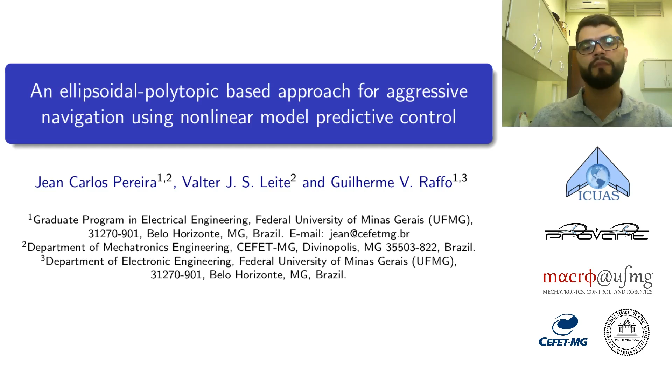I and Guilherme are with the graduate program in electrical engineering at UFMG. I and Walter are with the Department of Mechatronics Engineering at CEFET-MG. Guilherme is also with the Department of Electronic Engineering at UFMG.

The presentation is divided into 6 main topics as follows. First, I will introduce the paper and right after define the problem that we are pursuing. Then I will show the main aspects of our proposed solution, and in the end I will present some results corroborated with a quadrotor UAV from numerical experiments, and draw the main conclusions of the paper.

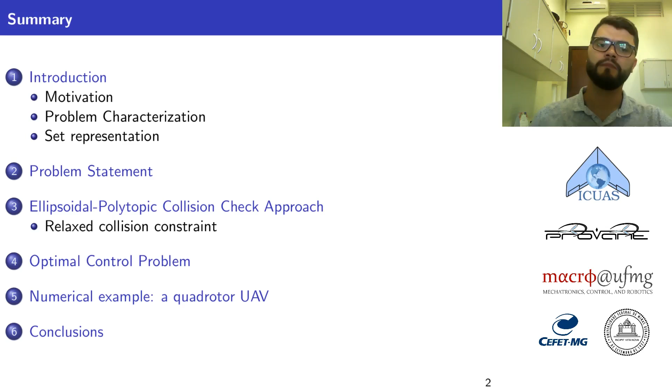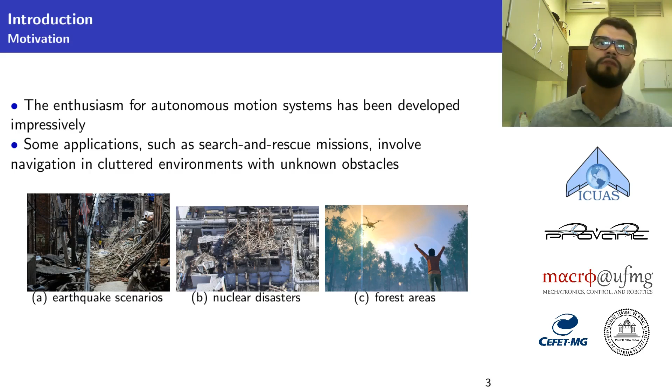So autonomous motion systems, which can be a robot, a car, a UAV, have attracted the attention of society in general in recent years. Some applications, such as search and rescue missions, involve navigation in cluttered environments with unknown obstacles. Typically, these vehicles must deal with earthquake scenarios, nuclear disasters, and forest rescues, as we can see in this image.

Let's assume, for example, that a disaster has just occurred. A distress call is then received by the firefighters for a person that is trapped in the rubble. Then the officers receive only a location point from a cell phone tracker, for example, that sends a GPS signal. However, this location is usually inaccessible or in danger of collapse, as you can see, for example, in this image.

A person inside sends a signal here. The firefighter receives just a GPS signal. So autonomous motion systems that can help this officer, such as a UAV or a mobile robot, are very useful for this type of mission.

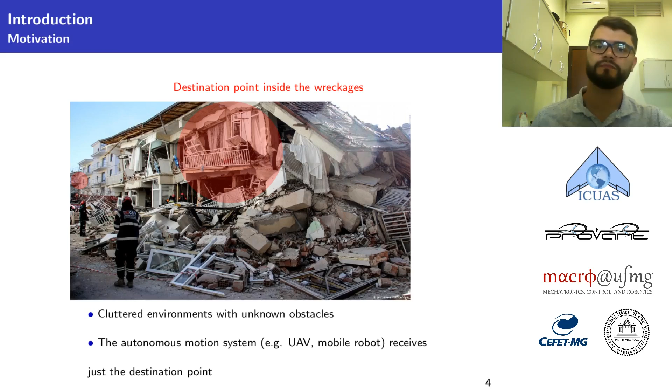Considering a UAV in the mission, the aircraft must navigate autonomously to the destination point while avoiding obstacles that have been discovered in real time. This means that the UAV must be capable of performing deviation maneuvers autonomously. But what happens when the available free space is not trivial? For example, when just a narrow gap is available to the UAV, as is shown in the figure.

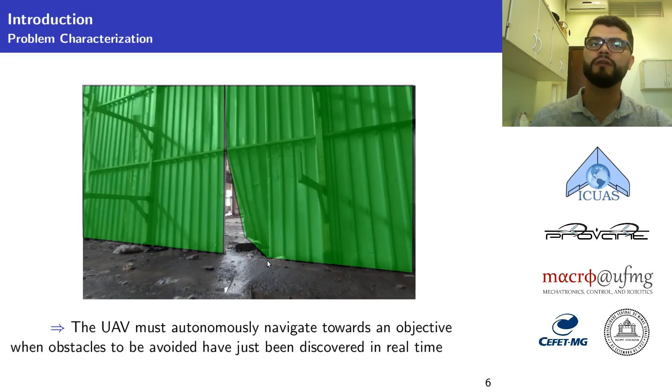Or to put it another way, what happens when the UAV attitude influences the success of the deviation maneuver? In this situation, the UAV must execute an aggressive maneuver. That means that the aircraft needs to fly fast, dealing with large linear and angular accelerations, while the UAV attitude is taken into account during the obstacle deviation.

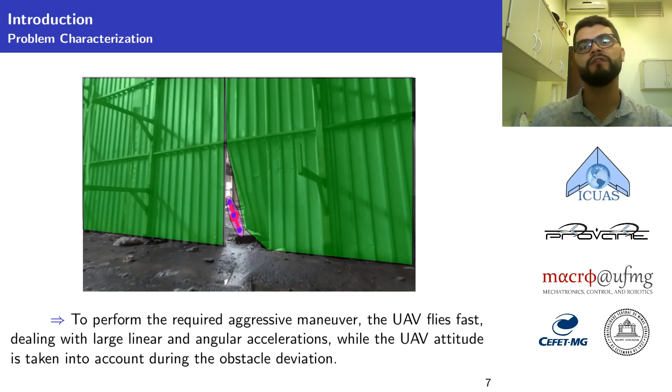Dealing with aggressive maneuvers requires a high-performance controller, since extreme flight conditions are required of the UAV. Furthermore, the controller must deal with the collision avoidance requirements, taking into account the UAV attitude during the deviation maneuvers. Also, since aggressive navigation is required, representational singularities should be avoided in the problem formulation.

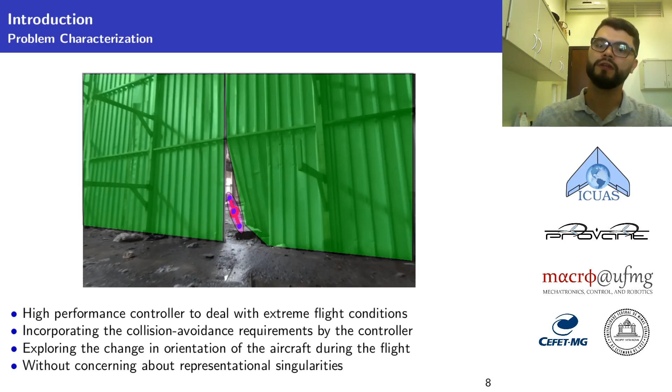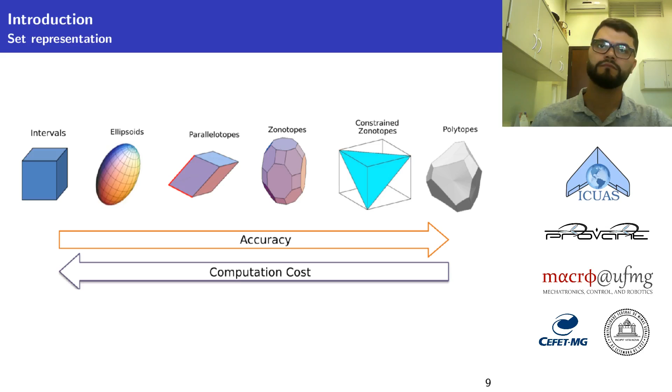An important design step in an autonomous navigation scheme with obstacle avoidance capability is determining how to model the motion systems and how to model the obstacles. The kind of set used to represent them usually is a result of a trade-off between accuracy and computational cost. The symmetric sets represented by intervals, ellipsoids, parallelotopes, and zonotopes have simpler representation and consequently simpler set operations. However, their accuracy is dependent on the object type, and usually an approximation is applied to model arbitrary shapes.

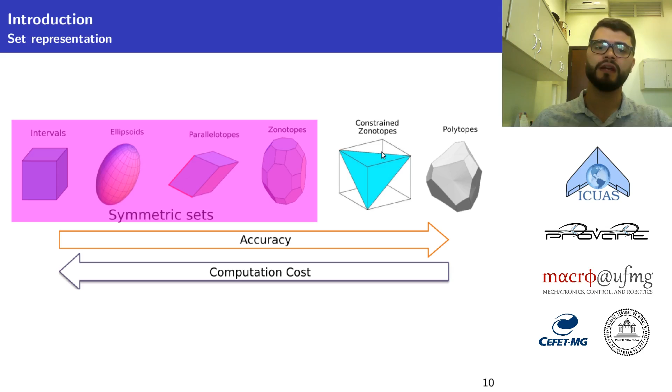On the other hand, we have more complex set representations. We have the traditional and conventional polytopes and the recent class known as constrained zonotopes. Although constrained zonotopes provide exact set operations with smaller computational burden when compared with polytopic ones, the intersection between two constrained zonotopes is achieved just by linear programming. This is a problem for us because NMPC with collision avoidance capability concerns the conditions under which the intersection between the sets occurs, which must be included in the optimization framework.

As most of the motion systems can be modeled as symmetric sets, and obstacles usually have arbitrary shapes, we propose then a mixed representation, and we derived an algebraic condition that checks the collision between an ellipsoid and a polytope.

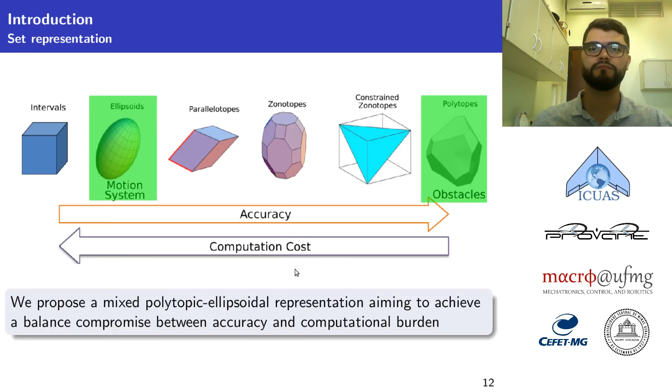Therefore, the main problem of our paper can be stated as the design of an NMPC for aggressive navigation of motion systems, modeled as a rigid body whose dynamic equations are formulated on SE(3). Usually these equations are obtained from the Newton-Euler approach as shown in equations 1, 2, 3, and 4. Here we see that the attitude of the motion system is parameterized by the rotation matrix R.

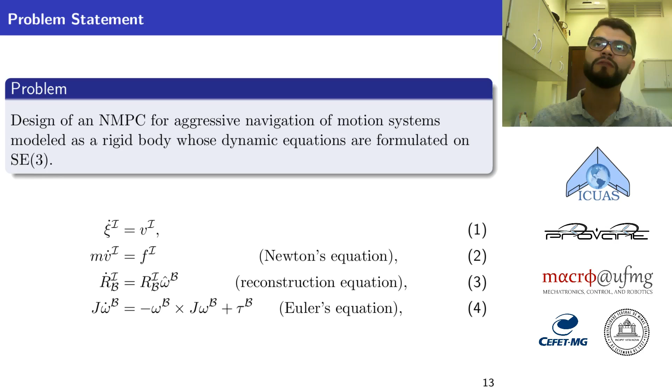Also, since the force F in equation 2 is usually modified by the attitude of the motion system, that is, the rotation matrix, we can say that these four equations are coupled. The ellipsoidal set that represents the motion system is given by equation 5.

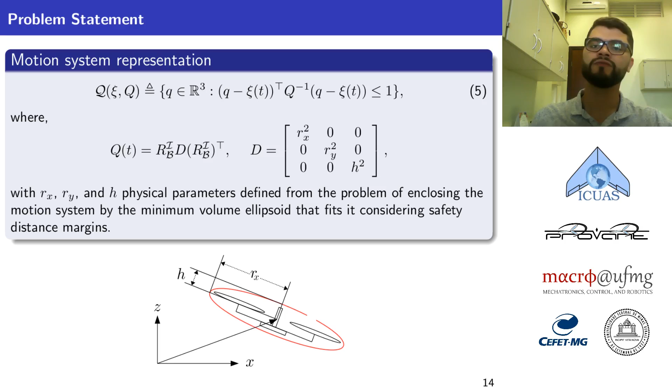Note that the set is defined by a matrix of physical parameters D, the position xi, and the rotation matrix, the last two being time-varying states of the motion system. The matrix D is defined from the problem of enclosing the motion system, as illustrated in the figure, and this parameter is defined considering safety distance margins.

The obstacle is modeled as a polytope using the half-space representation given by equation 8. That is, the polytope is a result of the intersection of m half-spaces given by equation 6. Also, each half-space has a complementary half-space set, here we call S bar, defined by equation 7.

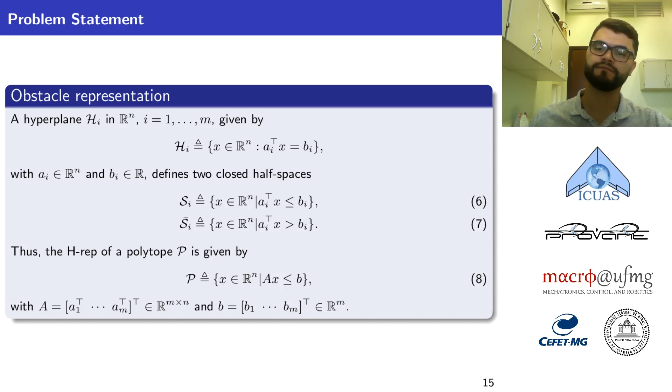Therefore, we derived an algebraic condition for collision check between an ellipsoid and a polytope, which is given by the following theorem. Basically, it states that if the function delta given by equation 9 is equal to 0, then the sets Q and P are disjoint.

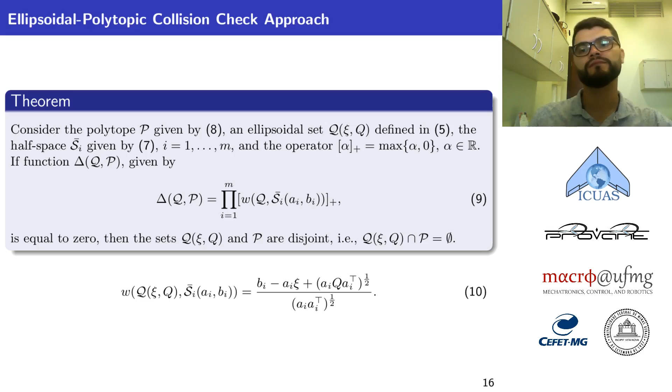To navigate safely, it's necessary to ensure that the ellipsoidal set Q is a subset of the free space during the prediction horizon and for all obstacles inside the sensor field of view. This condition can be guaranteed if delta L is equal to 0 during the prediction horizon and for all obstacles inside the sensor field of view.

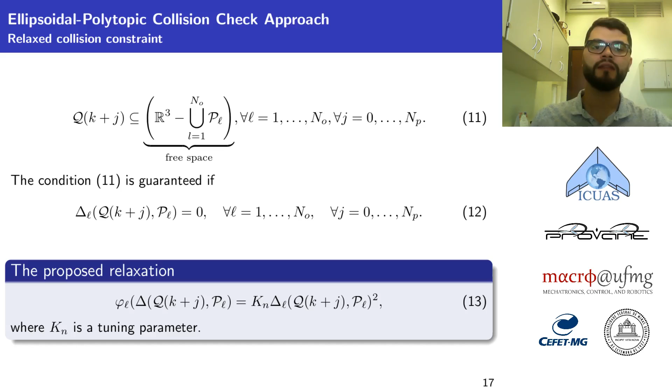However, the constraint 12 is considered hard and computationally costly. To improve this, we replace the constraint 12 by a soft constraint, considering the penalty function 13 in the cost functional. Finally, the NMPC scheme repeatedly solves this optimal control problem.

The cost functional that is minimized is composed of the quadratic error of the position, the attitude error, the control effort, and the penalty function for the obstacle avoidance. This optimization is subject to the model of the system and to the admissible sets big X and big U.

Note that the state X is composed of the position of the motion system, the velocity of the motion system, its attitude parameterized by the rotation matrix R, and the angular velocity represented by omega.

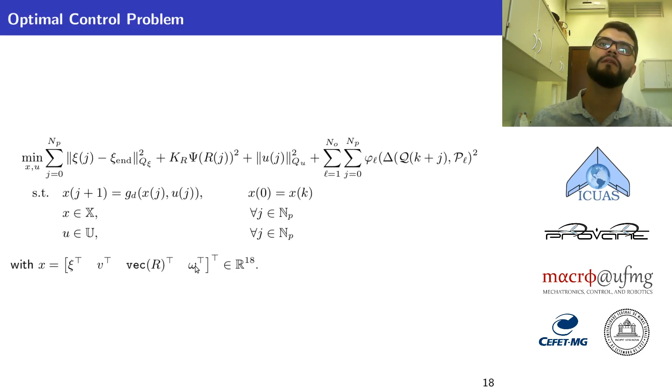Okay. From numerical experiments, the proposed NMPC is validated with a quadrotor UAV. The figure illustrates this experiment in which the UAV must perform a point-to-point motion while avoiding obstacles that are discovered during the flight. So the UAV begins here and has to reach this destination point. The obstacles are discovered during the flight. So here is an example of a cluttered environment with unknown obstacles.

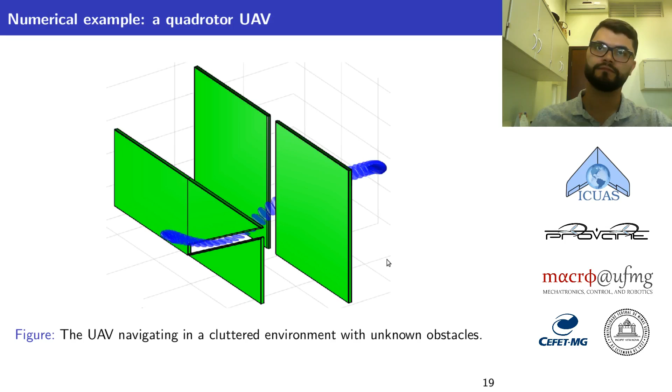This video shows the performance of the experiment. Here we have the top view, the lateral view, and the isometric view. I put here the aggressive maneuvers in detail and in slow motion, showing the UAV flying through narrow gaps, that is, when its diameter is bigger than the length of the gap. So the only way it can pass the obstacle is by performing an aggressive maneuver.

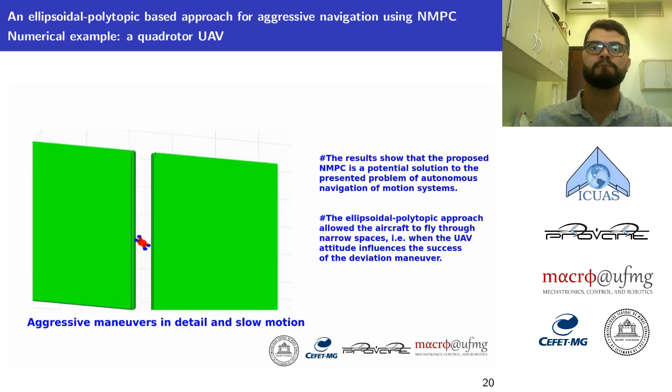One more time. In slow motion, the first gap pass. And another gap pass.

About the conclusions, the results showed that the proposed NMPC is a potential solution to the present problem, since first, we designed a unique optimization layer for both control and trajectory planning. We derived an algebraic condition for collision check which allows accuracy in representing obstacles as polytopes, these obstacles having an arbitrary shape,

and the aggressive maneuver capability makes the obstacle avoidance process more efficient, allowing the aircraft to fly through narrow gaps and perform deviation maneuvers whose success depends on the attitude of the UAV. As our future work, we intend to extend the proposed NMPC to a robust formulation, analyze the controller stability, and test it in real experiments.